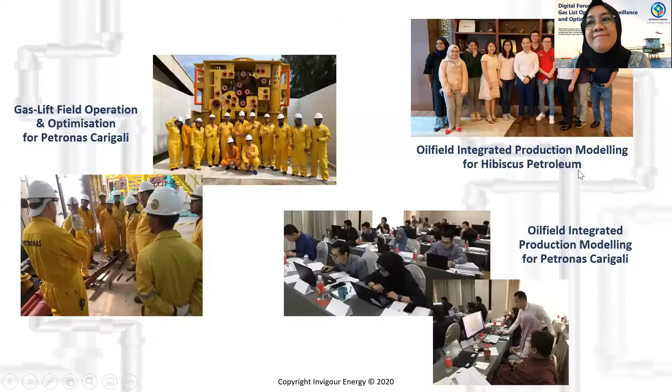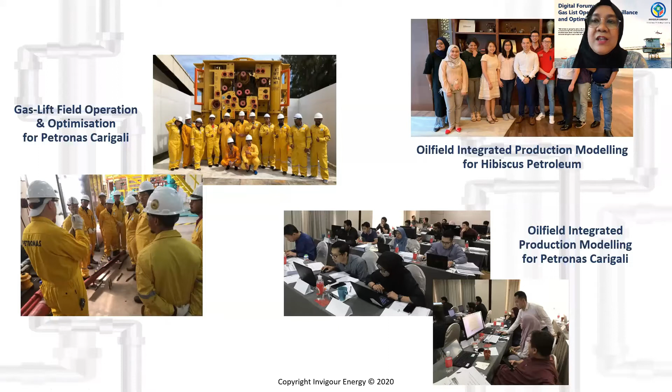As part of our learning product offerings, we have conducted quite a number of industrial training courses with our experienced instructor and our very experienced guest trainers. Some of the training that we've conducted are practical course for Gas-Lift field operation and optimization, and oil field integrated production modeling. We also plan to have a new one coming out, which is an introduction to production technology, happening very soon. Please visit our website at www.invigourenergy.com if you would like to know more about our training courses. We will also provide more information on this towards the end of our forum, so please stay tuned.

For your information, we are also a certified member of CPD UK. Two of the courses we mentioned, the Gas-Lift field operation and optimization, and also the integrated production modeling, are both certified with CPD UK. We are also looking at adding more accreditation with CPD UK on our additional training courses. This is actually our commitment to create and meet higher quality training to our clients.

Just to share a bit of good news as well, we've recently received an award called the SME 100 Fast Moving Company Awards. This is a premier regional award for small and medium-sized enterprises, an assurance to our customers, investors and partners that we have achieved a level of success that is quite beyond the ordinary.

The next category is we are looking to optimize gas lift performance. So what do we mean by that? Sometimes you might have a well that is injecting too much gas or too little gas, and through a good gas lift design, we are trying to basically achieve efficiency. What we mean by that is we are trying to lift the maximum amount of oil or liquids by using the least amount of gas.

That's optimization. The next thing would be improving the gas lift performance. Typically this will be things like trying to achieve a deeper injection, because when you inject the gas at a deeper depth, you can lift more fluids, you can create better drawdowns. Also if you can inject more gas, that will help lightening the gas column, the liquid column inside the tubing, much better. Lastly, if you have a well that is having multi-pointing issues - what we mean by multi-pointing is when we have multiple unloading valves inside the well that are injecting - sometimes, depending on the situation, that could not be desirable.

The next category is we could be trying to alleviate well stability issues. In some cases, when you have a well that doesn't have enough gas, the well could be slugging. By injecting more gas, we could actually help the well to become more stable. So that is one of the methods that we can use gas lift to optimize the wells.

The other one is in the case of a dual string, where you have the long string and short string - they are interfering with each other, and both strings are stealing gas from each other, and that is what we call gas robbing. By doing a new design, trying to alleviate the problem, that will solve the problem. So that could be another objective.

So we have quite a few people joining us today, and I can see that there are quite a few that are quite new to gas lift. So I'm just going to go through a few slides talking about exactly what gas lift actually does in the wells. In the next few slides, we're going to show you how gas lift is used to unload a well.

So now, as we commence the gas injection to unload the well, we're basically injecting gas into the casing, and the casing pressure will eventually build up to a certain pressure. Now, as we continue the injection, what will happen is they will reach a point where the unloading valve will start to open. In this example, the gas lift valve that we have used is actually an IPO valve.

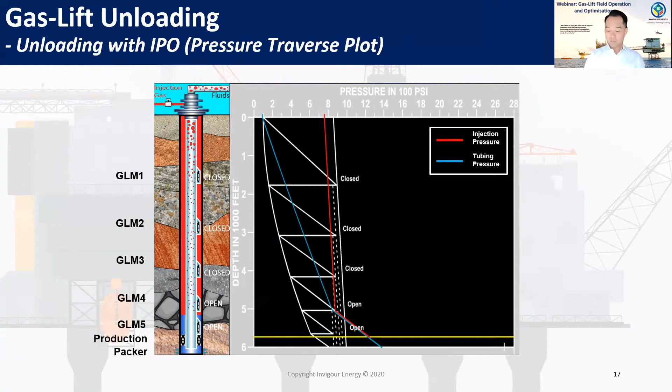So if you like, that is in some way the ultimate objective of gas lift unloading. So that is gas lift unloading. Now I'm going to go over some other considerations.

Of course, before we start the gas lift design, we have to bear in mind what gas lift equipment is installed in the well, so then we know what we are dealing with.

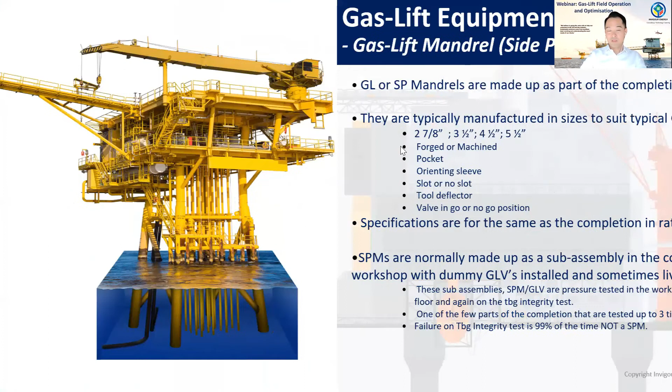Now it's very important for a gas lift completion to be completed with a gas lift mandrel, sometimes also called a side pocket mandrel. What the gas lift mandrel allows is for the gas lift valve to be installed in the mandrel, so you can then either plug off the mandrels, or have an unloading valve, or have an orifice valve. That gives us a multitude of versatility for gas lift designs.

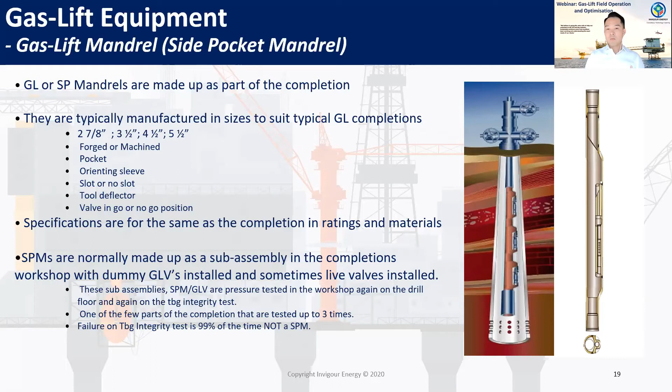Of course, if we have more mandrels, that gives us a better envelope for designing. Very often you see that when a well is installed with very few mandrels, that really restricts the extent we can achieve with the gas lift design. The size of the mandrel depends on the size of the tubing, so obviously if the casing is bigger, the tubing is bigger, it tends to be equipped with bigger mandrels. So the mandrel is a key element for gas lift completions.

Now I'm going to go over to the gas lift valve.

So there are predominantly three types of gas lift valve. The first one would be a dummy valve, essentially used to plug off the gas lift mandrel that we don't need to use. Depending on the gas lift design, we may only use a number of the mandrels at different depths, and certain mandrels will not be used. When that happens, we need the dummy valve installed to isolate the mandrels.

The second valve would be the orifice valve, which is very common. This is normally how we achieve the design of continuous injection at the orifice valve.

The next valve would be the unloading valve. This valve tends to be used during unloading. As shown in the previous example, the unloading valve is instrumental for transferring the injection from the shallow points to the deepest points. So the unloading valve is really the equipment for doing that. Very often you see that a gas lift design would have the orifice valve at the deepest mandrel, because that is normally where we want continuous injection at the deepest depth.

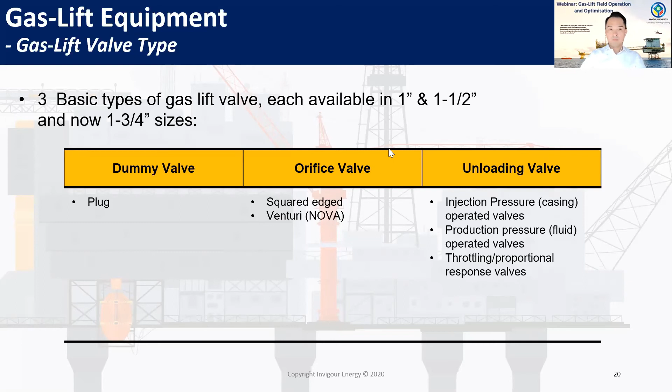So how does a gas lift valve work? A gas lift valve is essentially like a pressure regulator. It's preset with certain pressure limits, normally set in the labs, and as long as the pressure is reached, the valve will start to open.

Gas lift unloading valves are essentially of two types. One is what we call the IPO valve, injection pressure operated valve, which responds to casing pressure. For this kind of valve, you need casing pressure to actually open the valve. The other type is the production pressure operated valve, meaning it's operated based on tubing pressure. This is different from IPO in that it needs tubing pressure to open the valve.

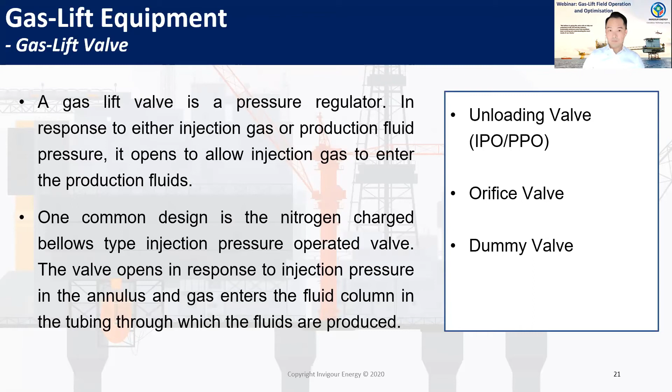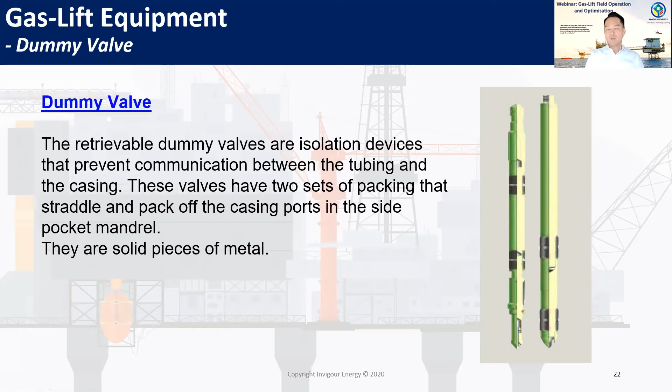So I talked about the PPO valve being an unloading valve that is opened by tubing pressure, and very often people ask why we need a PPO valve. You find that PPO valves tend to be less common because they are actually quite difficult to design, requiring another level of thought when it comes to gas design. But it does have its uses, for example in the case of a dual string well, when we are trying to manage the interaction between the long string and the short string. That would be an instance where we actually have to use a PPO valve.

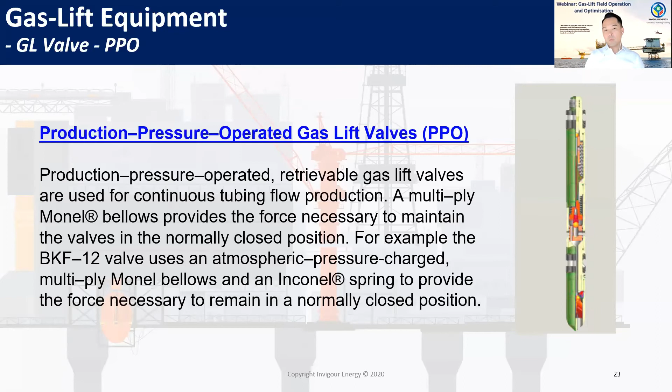The next category would be the IPO valve. IPO valves tend to be more commonly used, purely because they are very easy to design, responding to casing pressure, which is quite easy to regulate. So a lot of operators find that the IPO valve is very easy to use. However, the IPO valve would not be the ideal choice for a dual string well, purely because when you have the dual strings sharing the same pressure, it's quite difficult to have one string operate differently when they are both subjected to the effect of the casing pressure.

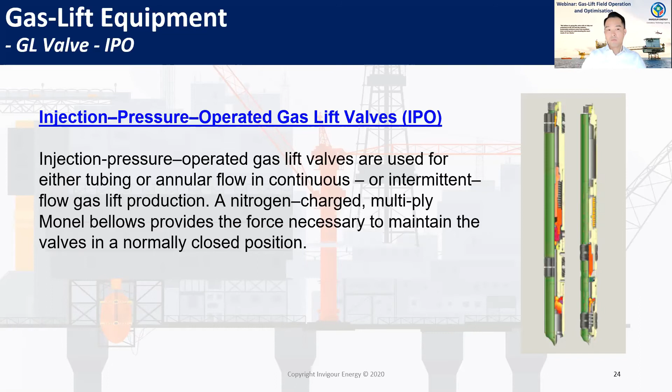An orifice valve essentially is like a door that is always open, and as long as the casing pressure is high enough to overcome the tubing pressure, you will have gas being injected from the casing into the tubing. The orifice valve is also equipped with a back check, to prevent reverse flow from the tubing into the casing. The reason is well integrity - often the return fluid could be corrosive, and you don't want that fluid flowing backward into the casing. The casing is a very important piece of equipment because it forms the second barrier for well integrity management. So we really try to protect the casing, and that's why we have the back check installed in the orifice valve.

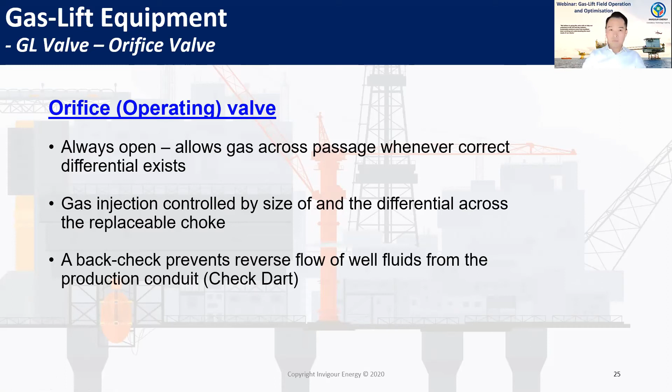So we've talked about the equipment. Now I'm going to quickly talk about what are the other considerations when doing a gas lift design.

When we start doing a design, very often we have to understand what exactly we're trying to achieve, and it's good to start with an end in mind. Very often we rely on what we call a performance curve, which is a graph of liquid rates versus gas rate.

The gas rate could be either a total gas rate or a gas lift rate. When the gas rate is gas lift rate, we call this a gas lift performance curve. So how do we use this curve?

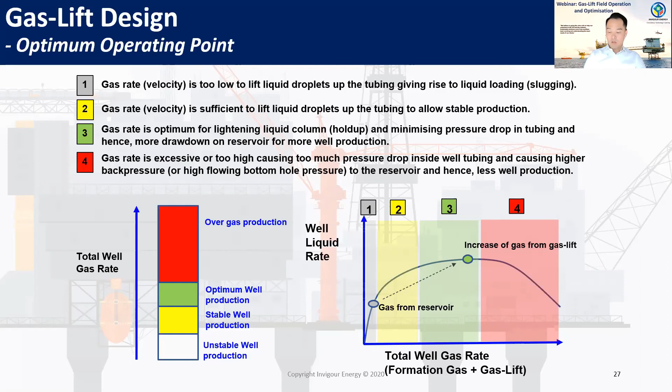For example, when you have more available casing pressure, there's more room to play with the IPO valve. When you have a lesser amount of injection pressure, a PPO valve sometimes helps in that scenario, because you could still achieve lifting to a deeper depth with lower casing pressures.

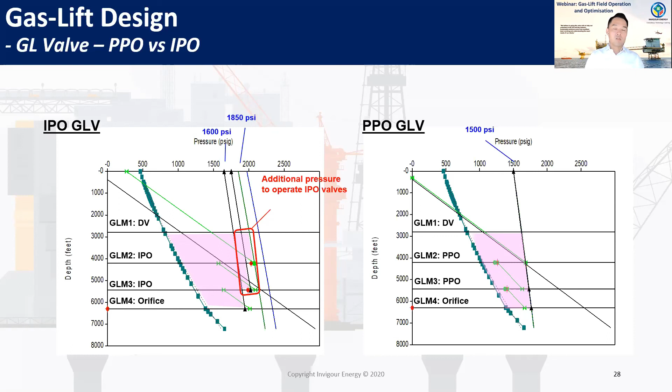So it all depends on what you have at hand, what the boundary is, and it's very important to know that before we do gas lift designs, because that really determines our choice of what kind of valve we'll be using, and what kind of playing room we have with the designs.

Now, if you are very experienced with doing gas lift designs, for example like David Lee or even Jim Ho in the audience, you'll find that you can probably do most of the design by hand, on a graph, on a piece of paper, or even just by thinking about it in your own head.

But some of us find that we could also do gas lift design using commercial software packages. Over here, I'm showing you a software called Prosper. You could also use WinGLUE for gas lift designs.

What the software would actually need is some of the boundary conditions. For example, we need to tell the software what is the back pressure for the well to unload the fluid to the surface systems. We also need to tell the software what are the available injection pressures in the system, available for use for unloading and kickoff.

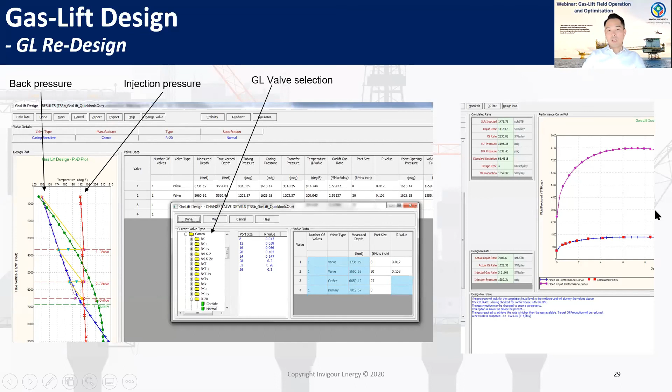We also need to tell the software what are the available gas lift valves for achieving the gas lift designs, and what sizes, and what would be the opening and closing pressures of the unloading valve. As I mentioned, we also have to tell the software what would be the design rate for the gas lift designs.

So there are quite a few considerations when we're doing a gas lift design, even with the help of software. And sometimes it can be daunting, and this is actually when experience really helps.

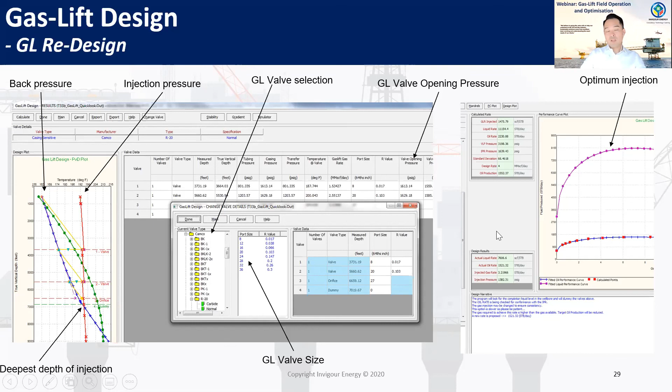So I hope I have been able to instill some thought in you when it comes to gas lift designs. Due to the nature of these sessions, we are not able to go into great depth, but I hope the material is enough to provide some thoughts and for you to ask some very good questions later on.